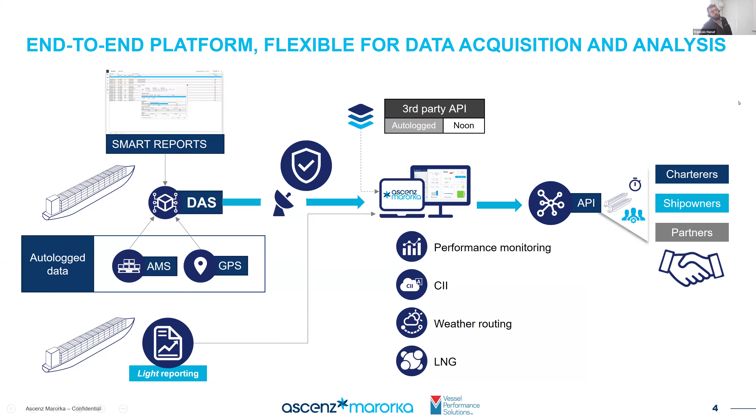So what is at stake, in fact, when we talk about ship models? The challenge is really the cost around the shipping. So today it's mainly the fuel cost. So this is an estimation from the IMO. The annual cost of fuel is estimated around $100 billion USD. And in fact, when we look at each percent of savings you could bring, it very quickly leads to actual savings, and this is only for the fuel.

As soon as we say 1% of savings per ship, by taking different hypotheses listed here, it directly will give you 10 to 17K USD per year in savings. So this is for 1%. So the more you optimize, of course, the more value you can generate. And this is the fuel cost for today, but now with the new regulation, especially EU ETS, the cost of CO2 emitted is not yet included. So you have also to include the savings in terms of CO2.

So the purpose is to see how digital twins or ship models, indeed there are many words around this, how those digital twins can help tackle this potential of savings for the shipping players. So what we propose for this webinar is to illustrate some technical solutions and to illustrate them with use cases on how we can leverage those ship models to tackle the potential savings we just mentioned.

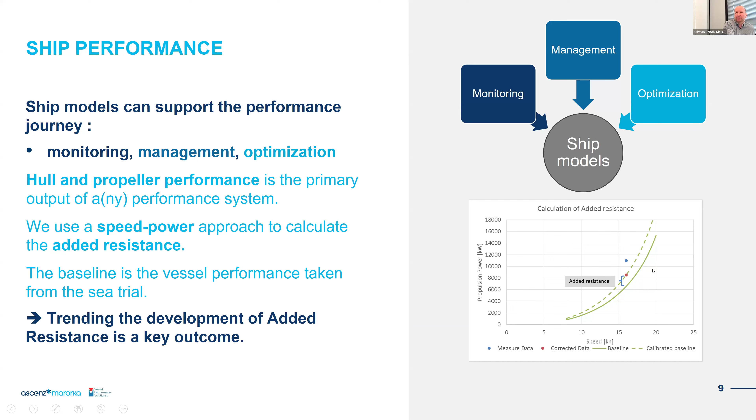So the added resistance here basically determines, first of all, what the fouling has been of the ship, and what the potential is if the ship is brought back into the condition when it was firstly delivered. So this added resistance can be trended over time and can then be used to make decision support on what should be done to the ship, but also to do more commercial decision support, as I'll get back into.

So when we trace this added resistance over time, we can see that it grows over time. Normally it starts around 0 when it comes out of dry dock, and then it grows over time. And between cleanings, hull cleanings or propeller polishes, you can sometimes see improvements. And then you can link that with the data and see how it grows. And you can use this trending, first of all, to determine how the vessel is doing right now. So you can have a good speed and consumption estimate of the ship. But you can also identify what is the potential if the ship was brought back into its best condition.

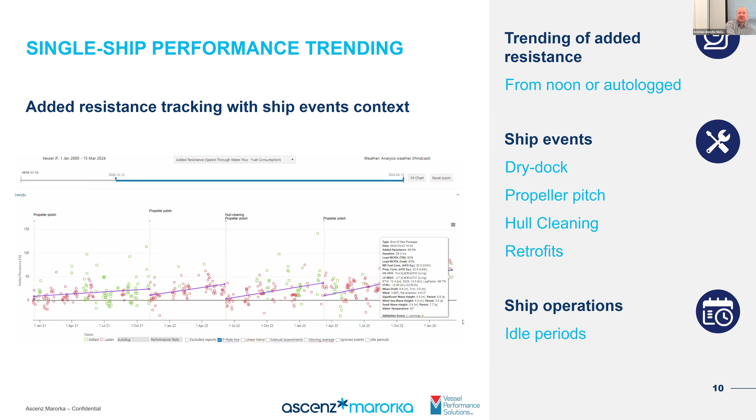So this is sort of the link between the raw data, the ship model, and then the performance side of things. We link it with the main ship events, so the dry dockings, the propeller polishes, hull cleanings and retrofits, and the ship operations side. So all this will give a good estimate of what's the potential of improvement of the ship in the condition it's in right now, but it'll also give commercial decision support, either to planning of a container network or for tramp shipping for bulkers and tankers, and help give estimations of actual fuel costs.

I'll just try to move on here. One too many here.

So when we look at the overall view of a fleet, then we can use this assessment of the added resistance on the individual ships to determine on a fleet level what ships are doing well and what ships are not doing well. We will come back a bit later to this mix of high frequency and noon data, but generally, if you have high frequency data and sensor data systems, you can determine the added resistance with a better certainty, and you can enrich the noon data with more certain predictions, but the fundamental methodologies work on both data sources.

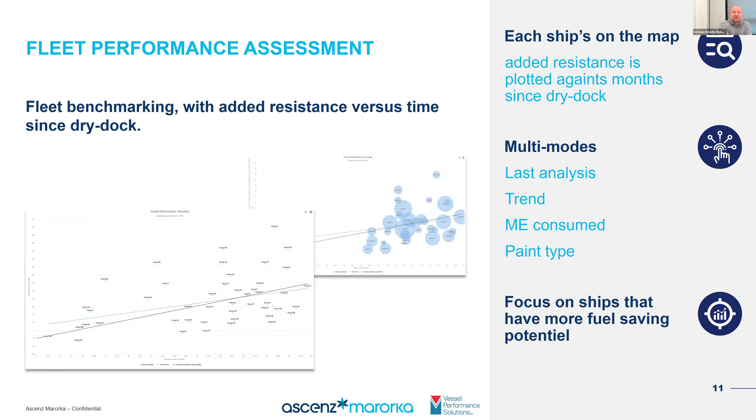So what we do is we use the noon and auto-log data, together with the ship model, of course, to create the short and long-term performance assessment. As I say, a very important part of this is just to determine what is the current performance of the ship, what are my speed and consumption tables, and how can I then use that in your commercial decision support of the vessels.

But of course, it'll also give you technical advice and technical input to what should I do with my assets. Should I do some cleaning, or should I do something to improve my assets? And finally, it also gives some benchmarking between the assets of the fleet. So which ships are good and which ships are bad, which ships are having a high consumption compared to others.

It's of course fundamentally the performance management. It saves time having things systemized and having a system that does this. It is of course possible to take the numbers out yourselves and work with that. But having it put into a performance system like this will make it a lot easier to work with on a daily basis if all these things are integrated and the algorithms and the way of analyzing is unified.

And finally, of course, you can help save money by giving decision support on what should be done with your assets, and identifying the bad assets, the ones with high degrees of fouling or with poor paint types, and finding out how to optimize it. So fundamentally, it will give you a more cost-efficient performance desk. It'll optimize the composition, because you can find out which of your assets is doing well and which is not. You can improve the plans for the vessels, for instance, if you have a bad rating.

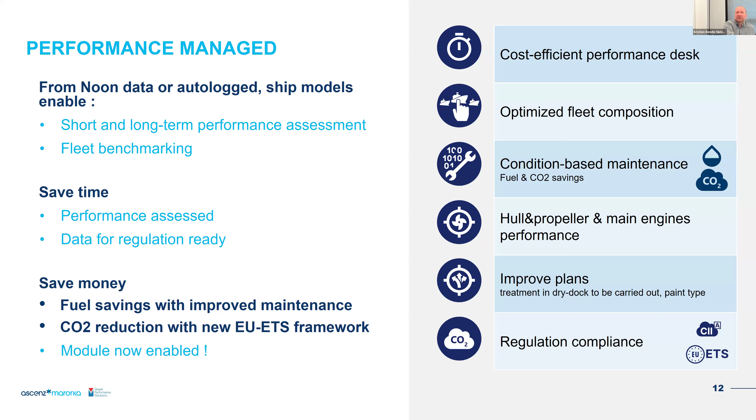Let's see. So what I'd like to address as well is the ability to add the crew into the loop. One thing is that most of this performance management is, of course, based on the ship having to report data into a system. It's probably less than 10% of the world fleet that's covered with a high-frequency data system. So at least for 90% of the world fleet, you rely on data reported by the crew.

But if you never give the crew access to finding out what we do with the data or how we analyze it or the importance of the quality of data, you will not be able to improve that process of the data collection.

I have to say, of course, the compliance side now has put a lot more focus and a lot more requirements on the data collection side. But involving the crew, we find, is key for this. The crew is not normally responsible for the hull performance in general. That is, of course, decisions made in the office.

So in general, what we do is recommend that you do fairly frequent propeller polishes, and that also allows you to monitor the hull, do inspections of the hull at a relatively high frequency, and of course you can couple that with the performance monitoring and the data you get back from the ship, and see how well it correlates. Does the ship look foul, or is there slime on it? And you can correlate that, of course, with the data and analytics.

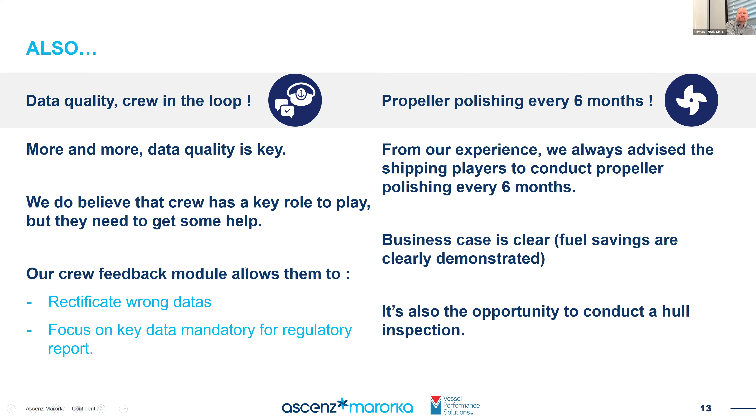So this is another big advantage of the way that the ships can work and give feedback to the crew: if you allow them to get access to the compliance and the validations of the verifiers, you can sort of build a self-learning loop into the system and allow the ships to take more leadership in the reporting to the verifiers and the compliance side. So we definitely find it very important to involve the crew in that. Now, I'd like to come a bit into the planning side of things and show a couple of examples.

I don't really know how I can leave this.

No. Okay, anyway, on the planning side we have a couple of modules that I'll introduce. I'll start by explaining how the scenario simulation works and how that can be utilized to get better cost optimization of the voyage. So using the ship models for commercial optimization. The scenario simulation is a module which will help simulate the commercial voyage bits for the loading and discharging, of course,

and especially for multi-leg operations, this is quite tricky if they do several loadings or several discharges and finding the balance. Normally, when you do the commercial optimization, you look at eco voyages and full speed. But when you look at it in more depth, for instance, the draft dependency or the weather factors become really important. So that's all built into the scenario simulation tool, which allows for much more detailed analysis of commercial voyages, avoiding the simplifications normally done in commercial voyage estimations. We'll have some examples. I'll show something on TCE optimization, and François will present something on LNG cargo constraints.

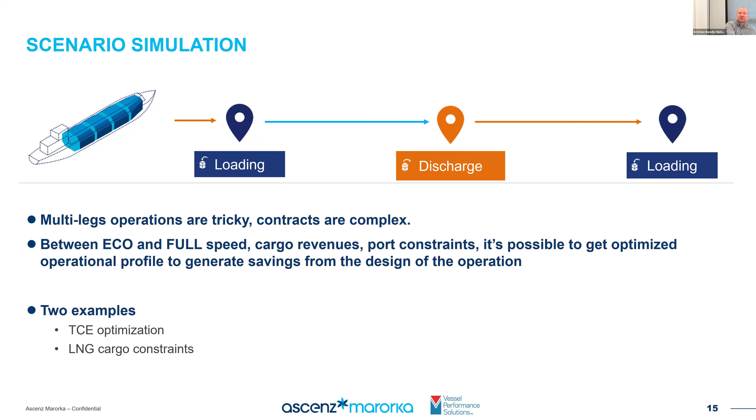So let's see if we can get this to shift. The scenario simulation basically works in that you define a voyage from A to B. You define a ballast leg and a laden leg. Here the laden leg is illustrated from South America to Belgium, and then you add the constraints of the voyage, of course, ETAs and laycans and so forth, the speed limits, and the associated parameters of the voyage: the cost of the vessel, the cargo commission or cargo payment, fuel types, and so forth.

With all that input, you can do a full simulation. What the tool does is put it all together and then simulate a wide range of combinations of speeds to ensure that you get the most optimal out of the voyage. It is presented so that you get an eco speed and a full speed estimate, and the result of this simulation will be a best yield. In this case, you can see that the eco and full speed are 11 and 14 knots, but somewhere in between, around 12.4, there's a simulation that gives a better yield and thereby better TCE. You can see these numbers here. I'll explain them on the next slide.

But fundamentally, it examines the full range of different speeds and drafts, and thereby finds the optimal combinations. And as I said, a tool like this will be much more advanced than what is normally used in voyage management systems, because there you have a fixed weather factor, and you also have fixed drafts. For instance, either you are ballast or you are laden. But that is not always the case, of course.

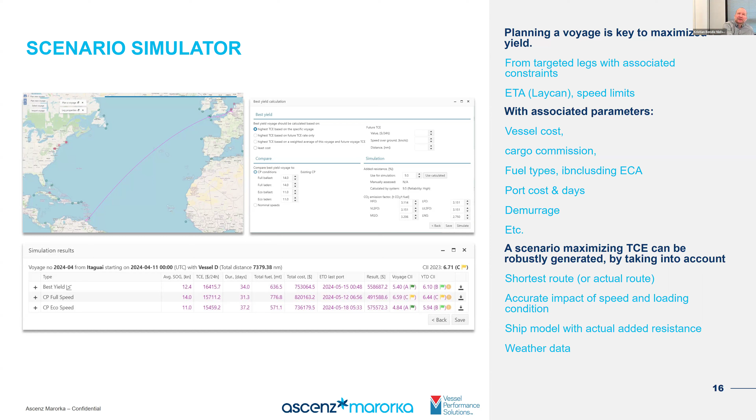If you have a trade with a heavy cargo, you have a higher draft than with a light cargo. And especially if you have multi-leg voyages, where you can't always assume that you're going on the full laden draft, you will also have intermediate drafts. So a tool like this will help improve the decision support commercially on the voyages.

So here, to drill a bit down into it, as I said, there were the two charter party full or eco speed estimates, and what the solution came up with was a best yield, which was a speed somewhere in between. So you can see there's a slightly higher TCE, a slightly higher daily earning in this, $705 per day compared to the full speed, and approximately $1,000 better on the eco speed.

Now, on the total cost side, the eco speed will always be the lowest because it takes the most time, and the result of the eco speed voyage will normally be better. But you will also spend more days in that. Let's see if I can get it to work. So normally in this example, the eco voyage here took 37 days, while the best yield was estimated to take 34 days. So even though you finally make more money on the eco speed, on a per day rate, analyzing and optimizing it for best yield will give you a better commercial voyage.

And of course, this will also give different impacts on the CII or other compliance parameters, which is of course hard to quantify. You will see how it impacts on the year to date, and again you will see that you get the best and the lowest AER on an eco speed voyage, but often there's of course a trade-off that you can remain within the same boundary of the CII, and therefore you get a better commercial voyage out of this, if you of course don't jeopardize and violate the rankings of the ship.

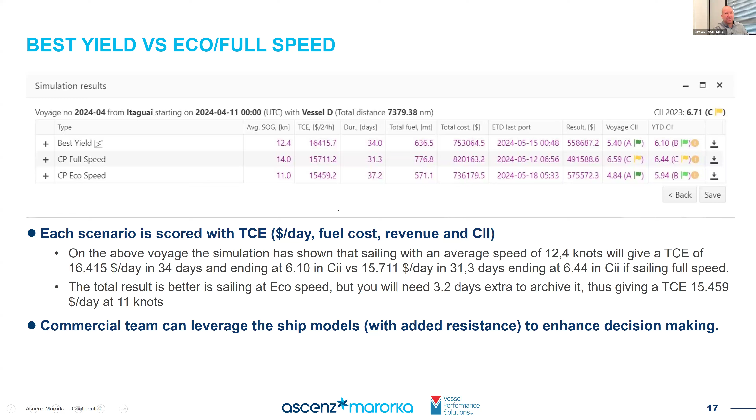So I think I'll hand it over to you now, François. Yes. I think I'll just exit here. No problem, no problem. I will take it from here. Thank you, Kristian. Thank you.

So after the scenario simulation, we wanted to present you another use case of how a digital twin can be used. This one is specific to the LNG segment. When we are talking about LNG carriers, they have a very specific aspect, which is that the cargo is also the fuel. So when you plan a voyage, you also have to anticipate for each scenario in terms of cargo what will be the context. An LNG carrier will load a cargo with a given temperature, which is cryogenic, so minus 160 degrees.

And when they discharge the cargo, the arrival terminal will have some constraints, saying the cargo should not be too warm, should be in a limited scope of temperature, or pressure, depending on the terminal. But it's really something interesting with LNG carriers. As the cargo is also the fuel, as soon as you plan, you also have to anticipate what the cargo will do. And in fact, it's not what the cargo will do, it's what you have to do to keep the cargo in the correct discharge requirement from the terminal.

So from this, we have to extend, in fact, the ship model. So we keep, of course, the propulsion model. We have also the hotel load for the diesel generators. LNG carriers have a gas combustion unit to burn the extra boil-off. And moreover, they have some active systems, reliquefaction plant, subcoolers, etc.

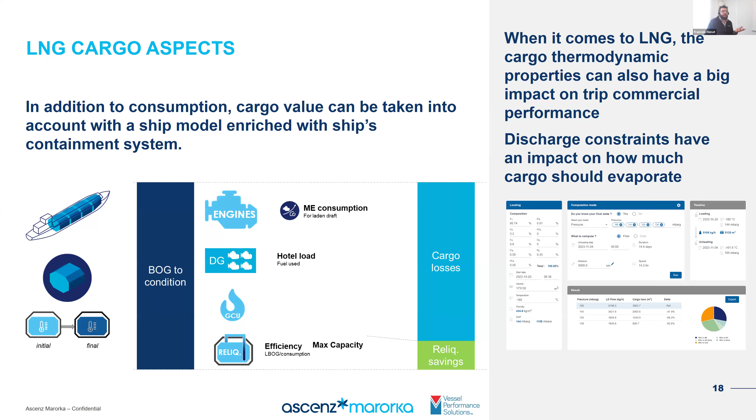This is to take the evaporated gas, we call it the natural boil-off, and as it's too much versus the engine's requirement, reliquefy it by, in fact, consuming additional fuel for the DGs, but in order to save the cargo. So in fact, the purpose of this ship model is to be called with two things: let's say an ETA first, because LNG carriers in general have to respect very defined, precise slots at the discharge terminal, and they also have to respect these cargo constraints at the discharge.

And that was a use case we did for a charterer. They wanted to help their commercial team to identify what will be the consequence in terms of loss of cargo, depending on two things: the speed profile. So on the same route for this trade, the US-France, test different ETAs that led to different speed, in fact, or average speed here, and also different temperature constraints at the arrival port.

So that's the heat map. And the idea was also to check. So you see the different temperatures tested, and to test it based on the equipment available on board. So in that specific case, if the reliquefaction plant was working or not working.

And in fact, it allows them to build some heat map like this to know, based on a specific speed I choose, so specific ETA slot and a specific constraint, should I fight for, negotiate with the discharge terminal for a slightly warmer cargo? And are you fighting for 10 cubic meters or 100? And the extreme value of those heat maps in terms of cargo value represents 300K USD.

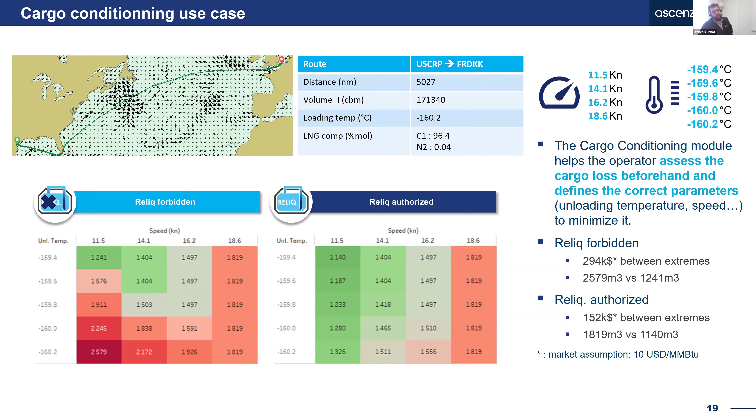The last part of the presentation is to mention what we can do when the vessel has left the departure port. And here with the live advice is to see how we can support the crew to save fuel. Two main use cases. The first one is the machinery. So on board, ships in general have multiple diesel generators, auxiliary engines, to deliver electricity for the hotel load of the ship. In general, you have multiple groups of engines, not the same maximum power, not the same MCR.

And each individual engine will have its own specific fuel oil consumption or efficiency curve. And the idea is to have those efficiency curves to look at every moment. Based on the electricity currently delivered by the DGs, is there another way, a better way to generate this electricity that will save some fuel? And that's the use case

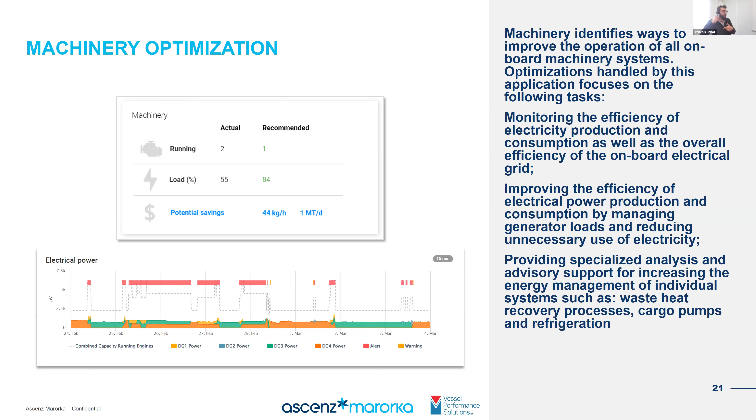which is here. In the left section, the red part, at this moment, we highlight that there is a deviation or at least room for improvement for the DG operation. At that time, the ship has three DGs running. By looking at this, if the crew missed it, because sometimes we have systems on board that can help the crew, but if you do not have a system on board, as Kristian said, most ships have only noon reports, from there you can also help the crew to say, be careful, please review if the DG usage is efficient.

Assessing this before and after, so they turned off one engine, and the estimation conducted with the user of this module was that for both maintenance cost, because having an additional engine will lead to maintenance cost, so operation cost, plus the fuel cost. So if you take into account both maintenance and fuel cost, it leads to $350 per day that can be saved or that are lost in case you are running too many DGs.

So this use case is really with a specific user. And of course, the purpose is to monitor that in the long term and to extend this, if we do not have a system on board, to a system to warn the crew automatically to review the DG implementation. Of course, when it's possible; sometimes when you're maneuvering or for specific actions you have to do, or in high risk areas, you may be outside the optimal ranges, no problem.

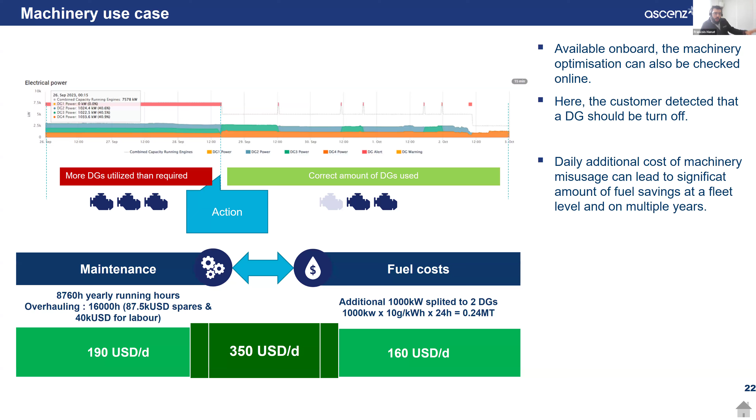Another use case is something that was launched last year, or maybe a little more now. It's the weather routing module. It's a very common tool for the shipping industry, but it's really something that you have to look at and that you can feed and nurture with ship models. The ship models, in that case, will contain the propulsion aspect of the ship, but we also have to consider the impact of the weather conditions, and not only the height of the primary wave. You also have to take into account the relative direction of it, and also the frequency of waves versus the

hull. So it's an extended ship model on which you add on top the impact of weather, to take into account the additional consumption and the impact on how you will conduct the operation afterwards based on some weather forecast. And same for machinery, it's not only to get one passage plan proposal, which by the way has to be efficient, but first it has to be safe.

So you also have to respect multiple constraints, being the restricted areas, the traffic separation schemes. You can also avoid specific areas, some passages, some piracy zones, etc. So it's an optimization algorithm that you will regularly feed with new information. Of course, new weather forecasts, it's always changing. And of course, what the ship actually did, because for those systems, be it with noon or sensor data, you know exactly what the ship did, and you know where the ship is. And potentially there may be some deviation, specifically when you have harsh weather conditions.

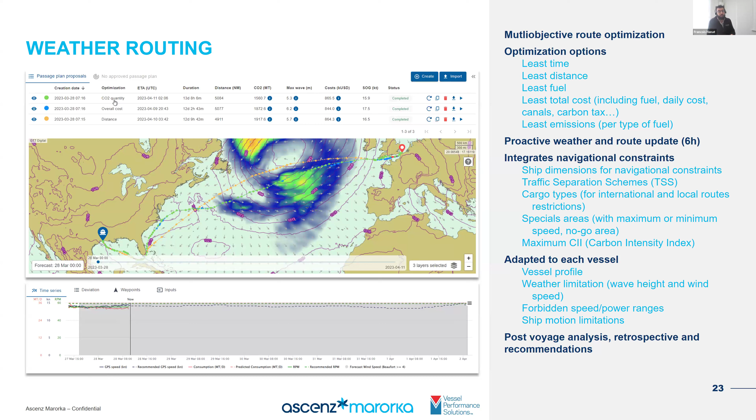Is it still okay? For instance, if you have a maximum wave height of 6 meters, and with the new weather forecast it's now 7 meters, maybe the master will want to rebuild a passage plan. So that's the first rule. And the other is, if you are trying to save fuel cost or daily cost or just distance, you can always look in parallel: is there a new optimized route that should be considered because, based on those new parameters, actual and weather prediction, a new opportunity appeared?

So on top of this module, these are some use cases we had with the team. Because on top of this system, which is standalone, we also have a fleet center that can support masters in defining safe and efficient passage plans. So this first use case was a combination to avoid a storm. To put it shortly, it's the rhumb line versus the great circle. To avoid a storm, a competitor provided a rhumb line route, so it's extremely safe, but it's really not efficient.

While in fact, if you always respect the maximum wave height set for this ship, which in that case was 6 meters, is there an alternative that is more efficient? And in that case, yes. So let's not take the simplicity of the rhumb line. Let's leverage all this information we have today, and it's really powered and driven by the accuracy of the ship model, to always meet the safety limits of the ship, but also keep on top of it a target of fuel savings, so fuel or overall cost, if you also have this to take into account.

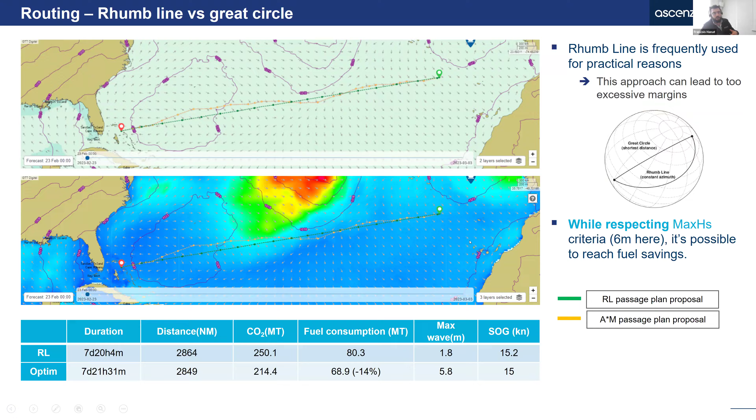So in this case it was roughly 14% saving for this one, because indeed the rhumb line is rarely the good approach. Another case, with the deviation point set by the master, in fact, within the Atlantic. So you can find alternative routes: the route planned from the vessel in green and the one that we planned in yellow, so slightly more GC as well. So in that case, less percentage than the previous, but still percentage of savings that can be leveraged.

And again, here you see it's really a matter of respecting the constraints. So always the RTA, required time of arrival, and if any deviation point, and potentially safety specific areas such as the NAVTEX, when you want to avoid the NAVTEX. In this specific case, the crew decided to deviate by the east, while in fact it was possible to deviate, always respecting navigational constraints, by the west, and in that case, a very short voyage with a much more interesting route in terms of fuel cost for this deviation by the west.

So always challenge, and in fact, it's a matter of giving the right tools to the people, because we may want to reuse a route that we used in the past, but always check if there is a possibility, with all this power driven by accurate ship models and also the tools we put on top to help make the decision with the optimization engines.

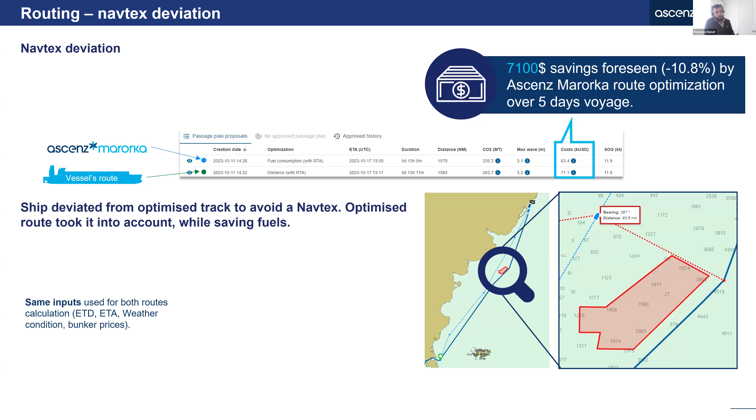That was the last use case, and to leave time for the questions, sorry, it took some time. The idea is really to try to save fuel and CO2 by leveraging those ship models, and as we said, on the long term, before the commercial operation and during the operation. So feel free if you want to engage the discussion, now or later, regarding how to leverage the data that are available, manual, of course, and potentially sensors. And as Kristian said, it's possible to work clearly and smoothly with both, and to find a good methodology to implement based on a specific segment you have

from the shipping industry based on specific contract types. You may not have the same flexibility. So we are open to demonstrate and pilot such solutions on your use case, and to potentially adapt if your use case is in fact a silent issue that a lot of people have. We're really looking to adapt and make our solutions improve for this.

And to complete, that's really why Ascenz Marorka and Vessel Performance Solutions teamed up: to deliver those advanced, precise features to help nurture the decision. And this combination allows to have something very comprehensive, from ship to shore, from vessel performance to regulation, to LNG, to offshore operation, and also the long-term partnership, because as it was said before, we are backed by GTT, our mother company, who is a long-lasting partner of the shipping industry. So yeah, we're here to help, and feel free to reach out now or later. Do not hesitate.